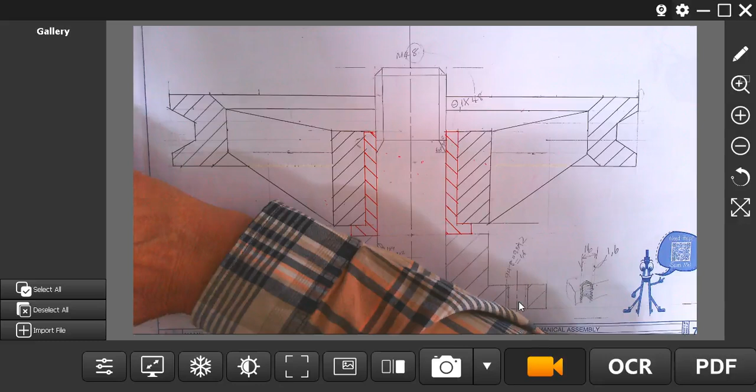I'm going to draw the nut. Now basically what you guys will have to remember is when we're going to draw the nut in place, we're going to draw the nut and it's going to cover up everything else. So it's going to be like turning a nut onto the screw thread.

Remember these lines here. I asked the grade 12s the same question. You guys could answer it. They couldn't answer it today. And I actually told them, my grade 11s know this and you don't know it.

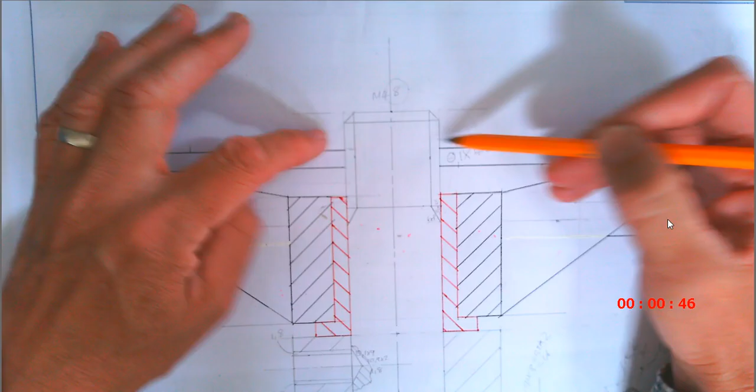Whatever the screw thread is, the M value is this width. So if they say it's an M24, this will be 24 from there to there. But we are drawing scale 2 to 1, so everything is double size. So what will happen here is this will become 48. So that will be a 4,8, 4,8, 4,8 at the top.

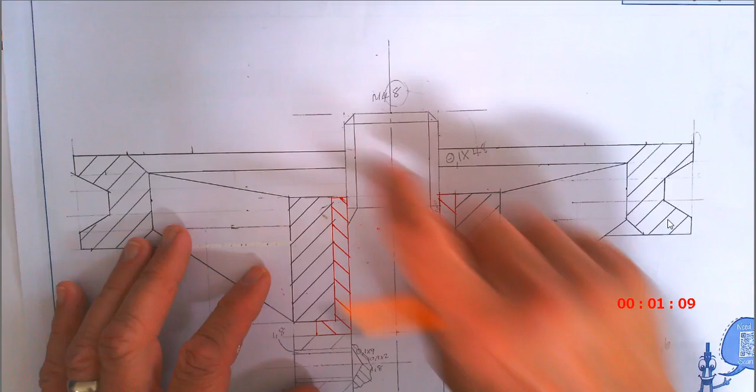Okay. The chamfer at the top, where it is lying at an angle, I told you guys that's 45 degrees, 45 and 45. And then this is where the screw thread ends, where that line is. And then I told you that if we draw this part in, this is where they end the screw thread. So the screw thread runs up to there.

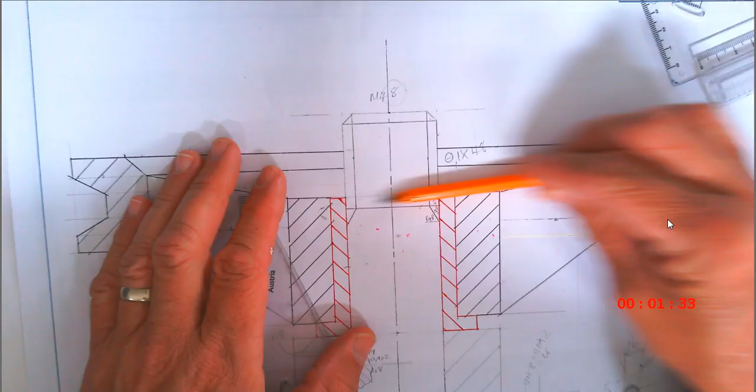What is a screw thread? That zigzag pattern that you see when you're turning onto a screw. And it ends over there. But this is where they cut it out, where they remove the bit as they're cutting it. So you have to draw that 60-degree line there. That's the only place where it is 60 degrees.

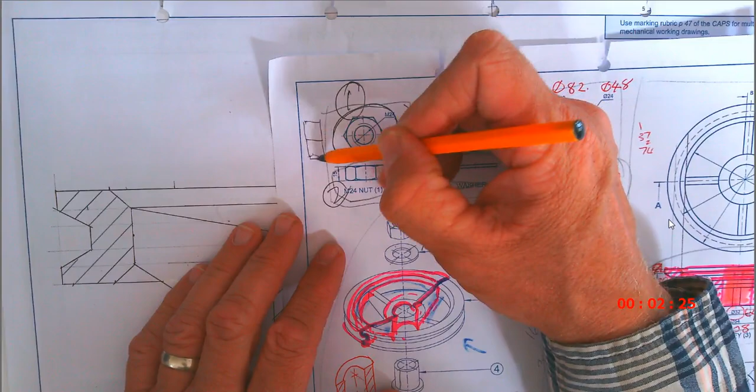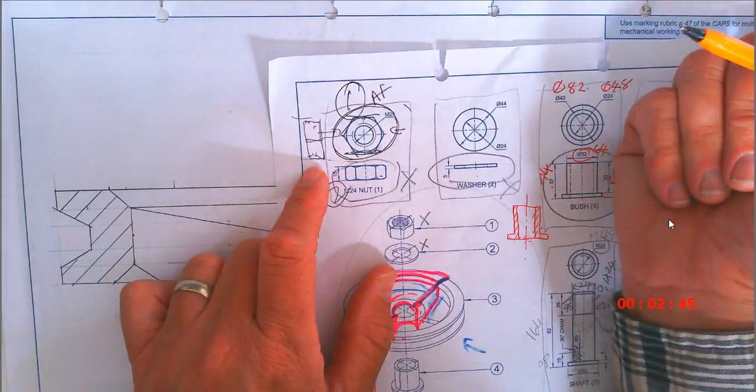What does that mean? It would mean that you're looking from the side or from this side and you're only seeing two sides of the thing. So if they give you the AF distance, AF meaning across flats, that would mean that you already have that circle size. So then you can just project your lines over and you can go on with your construction. But in this case, we actually see 1, 2, 3 surfaces.

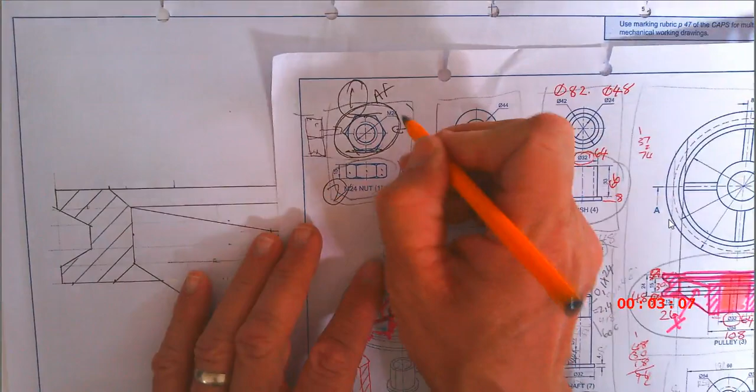Okay, so let's quickly focus on that. What we're going to do, because we have limited space, we can't draw the whole thing. I'm just going to draw half of the nut, so I'm just going to draw either the bottom or the top. Okay, but the first thing that we always do is let's quickly identify that hole. That screw thread is of course M24, which is going to become 48.

Okay, then you take that distance and you add half of it to that number. What is that? What is 48 plus 24?

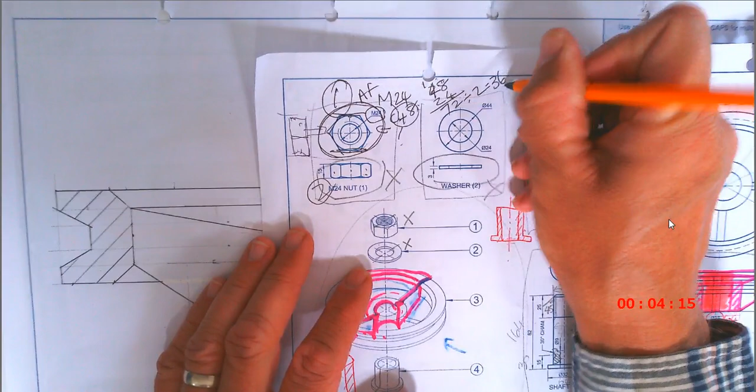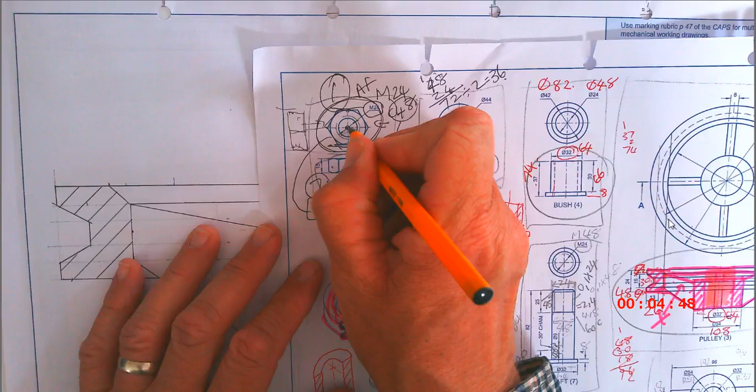Okay, so, as julle dit wil onthou, hier is die formule. This is the formula. You can also do it this way, 1,5, which is 1.5, times the M value. In this case, it's going to be 48. So, 1.5 times 48 is the same as 48 plus 24. Okay? And that you're going to take and you're going to divide that number by 2, and that's going to give you the radius that you're looking for. That's going to give us from there that size. If you don't have that, you cannot draw the nut.

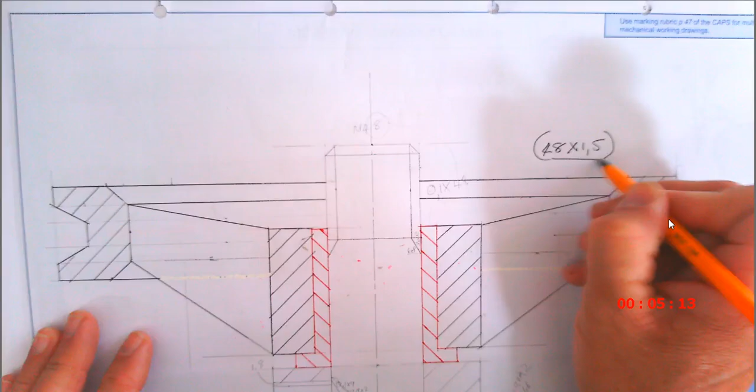I'm going to write it here as well. 48 in this case because it's M48 times 1,5, and then you take that number and you divide it by 2, and that's going to give you the radius for this specific thing, and this is going to be radius 36. Okay, right. So kom ons gaan doen gou dit.

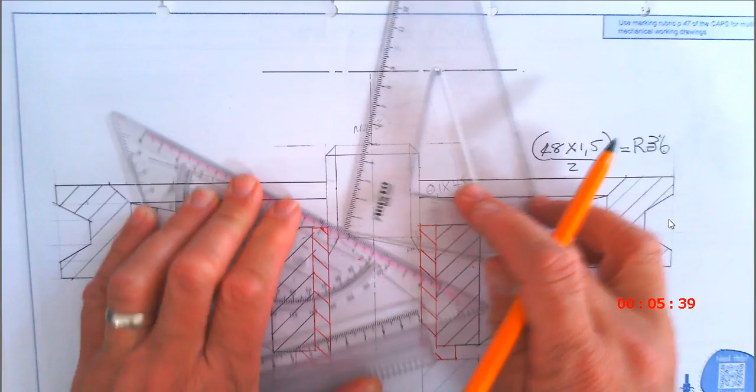My pencil jammed yesterday, so I'm going to draw the nut with something else. Okay, so I'm going to draw a center line here at the top, anywhere over here, because I am going to do half a circle, semicircle.

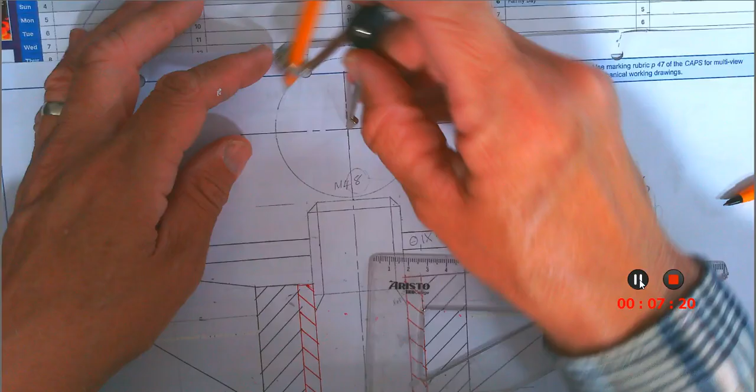Okay. I'm going to tell you guys in a moment why this is so important. There's so many marks on this part of the drawing that you don't want to get this wrong. Okay. I'll show you in a moment how this works.

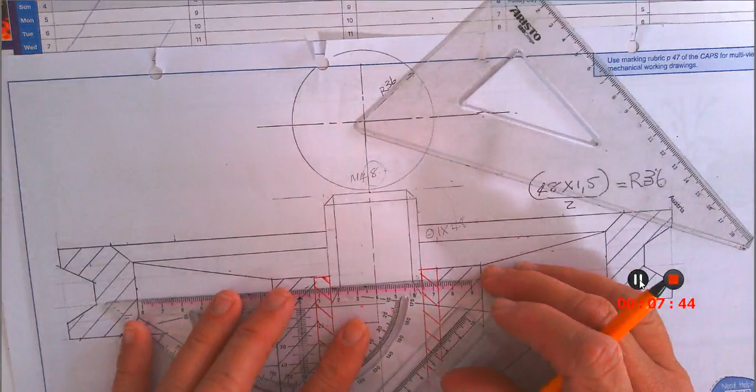Okay. So this circle has got a radius of 36. And I'm not going to draw the whole thing. I'm just going to draw the construction now, and I want to get the width of the nut. Now you're going to need a 30-60 degree triangle. This one. And now if my nut is positioned like it's in this case, where I'm going to see 3 faces, I'm going to move this line down.

Please remember this is not a normal hexagon. Okay, so it's not a normal hexagon like you always draw. So the lines are going to go on the outside of this object. So a horizontal line there, 2 60-degree lines, a tangent, in other words, it needs to touch the line there. It's going to run through that line.

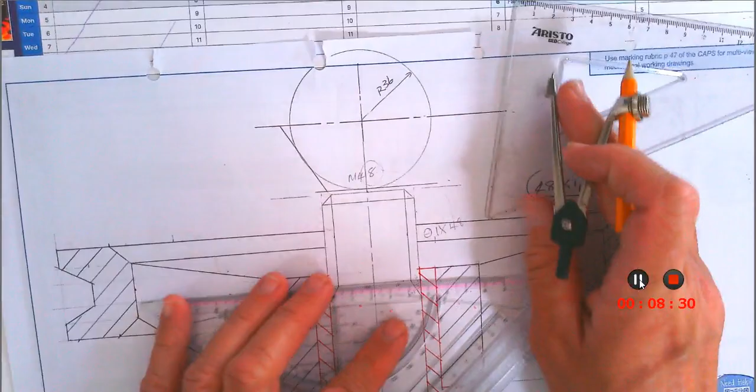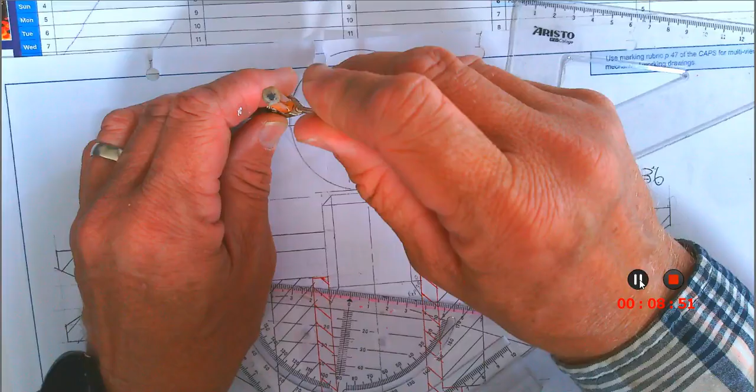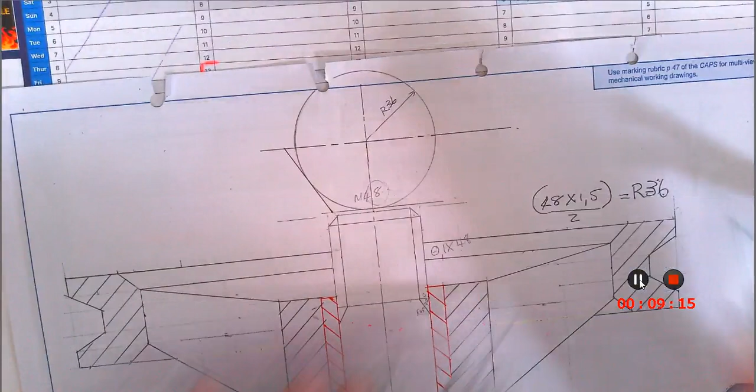That is slightly inaccurate, I can see it, and it shouldn't be inaccurate. I'm just going to fix that quickly. That 0.5 millimeter is going to give you problems. I'd rather redo it. Okay, I'm going to quickly try again. Okay, so going to draw a tangent here, make sure it's accurate. Okay, I'm going to do the same thing on this side. Make sure it's on the line.

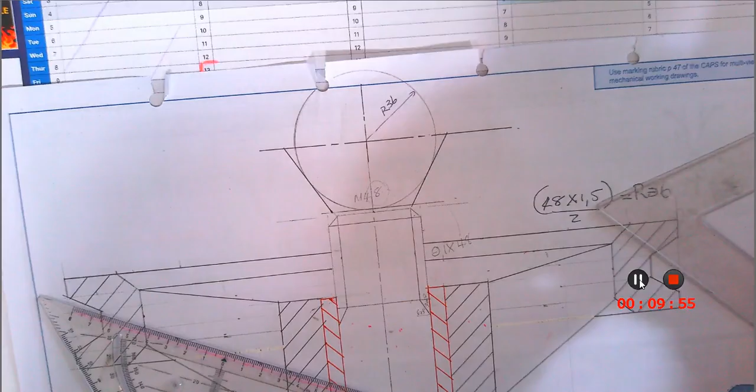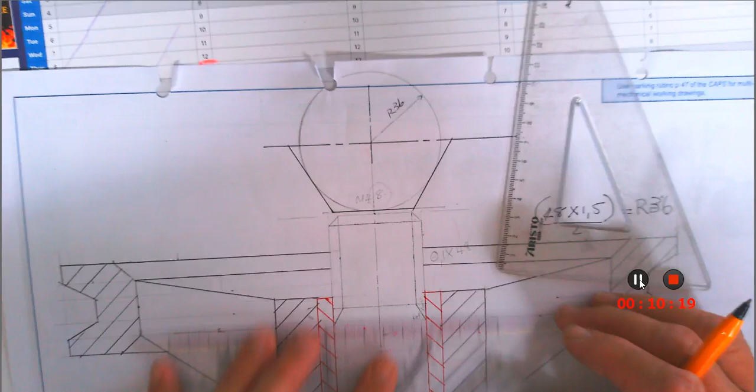Now we draw the upper part as well. We draw the screw thread and the M value circle in the middle. We're not going to do that now because we're not going to need it for this specific drawing. Okay, so what I'm going to do is I'm going to project the lines down, and this is what is going to give you the width for this specific drawing of the nut. So I'm just going to project all these lines down.

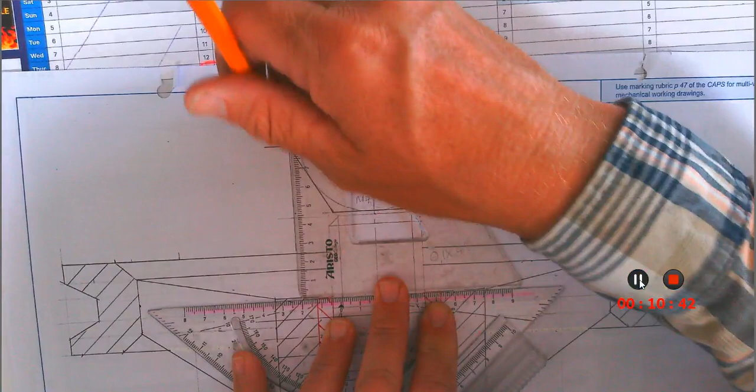Going to bring a construction line down there, a faint line. Going to bring a faint line down on this side. So there's a line. Going to have a line over here. Going to have a line over there.

So this I'm going to draw with a pencil, and I'm going to zoom in slightly so that you guys can see this even better, because we have to get this right.

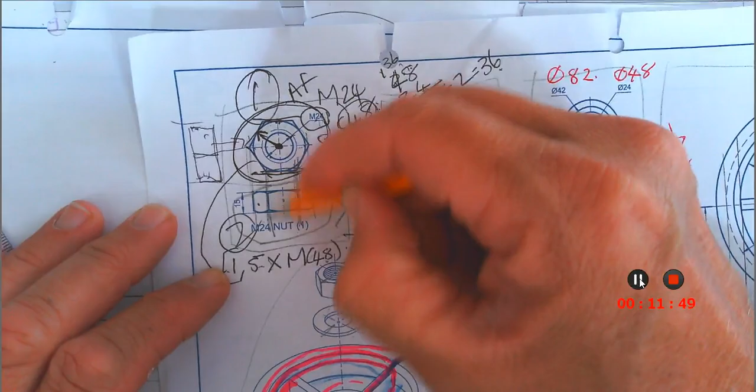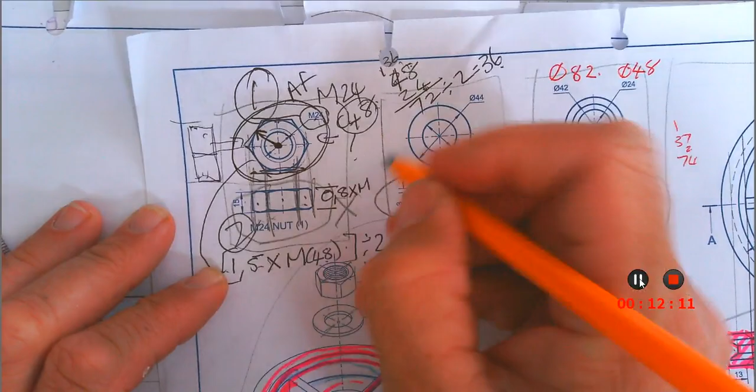To work out the height of a nut, if they don't give it to you, it's 0.8 times the M value. So in this case, M48. But you can work on whatever they give you. In this case, it's 15, which is going to become 30 on our drawing because it's scale 2:1.

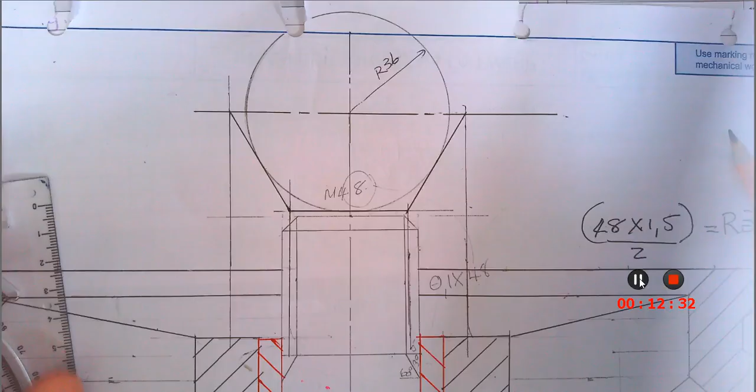What? The washer, né? Julle gaan sien hierso. There's the washer, and then it's the nut. So we have the pulley. We're going to draw the washer and the nut. Are we going to cut the washer? No, we're not going to cut it. And we're also not going to cut the nut.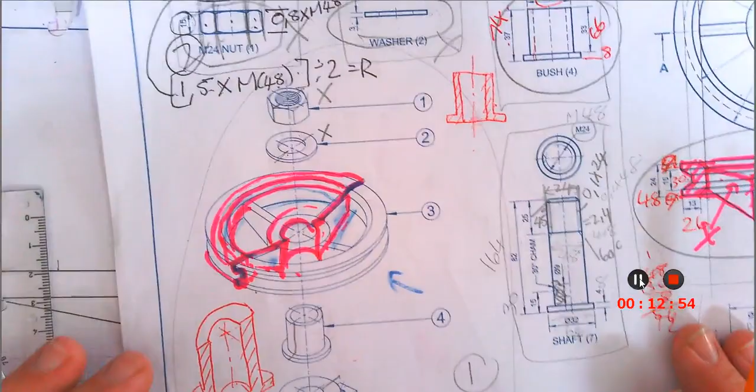That they give that to you. It is diameter 44, which is 88. And the height is 3, which is going to become 6. So 88 and 6. Ek gaan dit net gou inteken. So it's 44 to both sides. 10, 20, 30, 40. Daar's 44. 10, 20, 30, 40, 44. The height is going to become 6. Now I have a line there, so julle kan dit ook inteken. There's the washer.

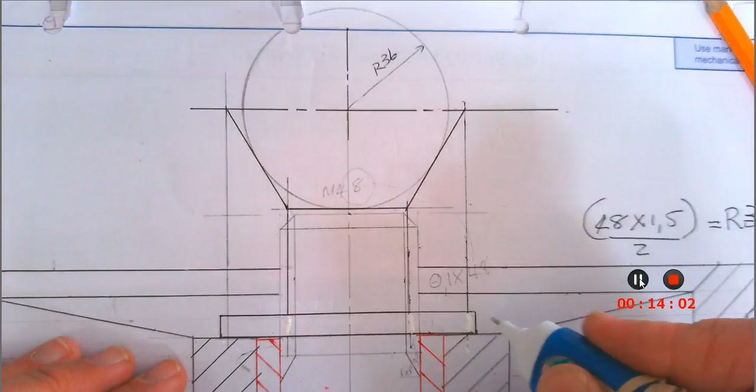That's not going to be there. Al daai lyntjies gaan opgecover word, né? So you're not going to have any of that. Please make a note of this when you are drawing this. Okay, so the nut is going to go on top of that washer. This is a round thing, it fits there, and then we're going to draw the rest.

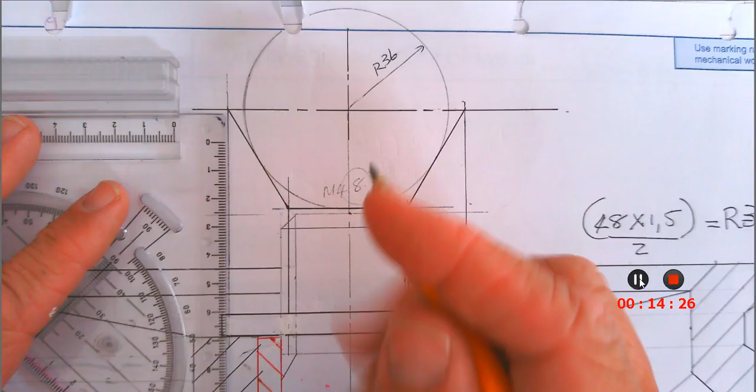Now we said that the height for the nut is 30, so let's have a look. Let's mark off 30 millimeters. 10, 20, 30. This is quite a big nut. I'm going to measure on this side as well. 10, 20, 30. Next time when you guys get to the AstroTurf, go and have a look at the nuts that they used

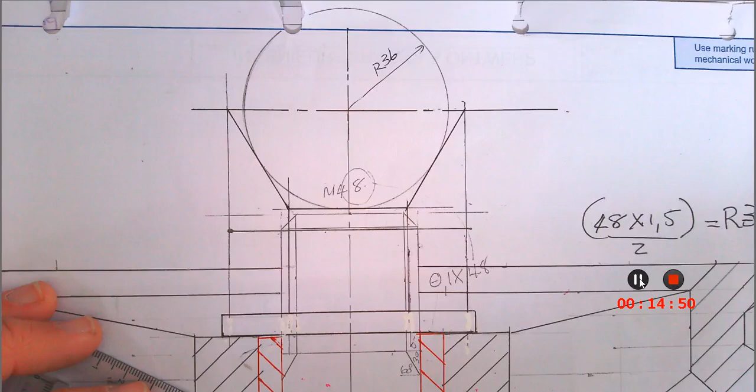But then you can see the detail of these nuts really well. Okay. So daar gaan 'n lyntjie wees. This is going to be a visible line. That corner there is going to give you a visible line right over here.

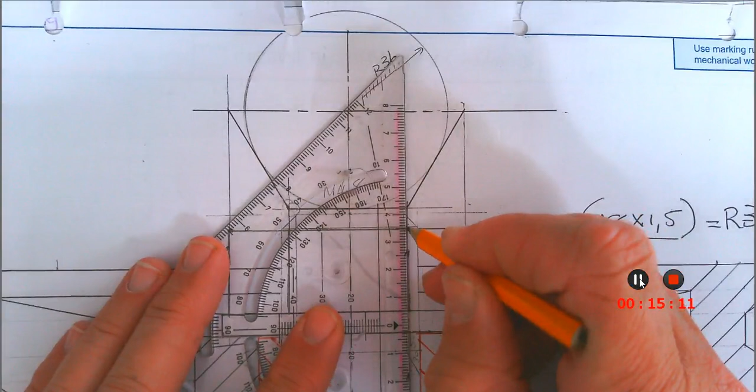This screw thread is still going to stick out. So make sure this is nice and visible. I'm just going to go over it once again so that you can see it clearly. Alright, that's still going to be there. The bottom part is still going to be there.

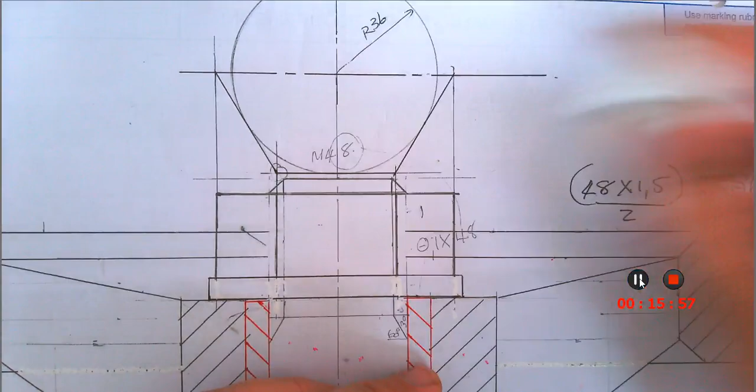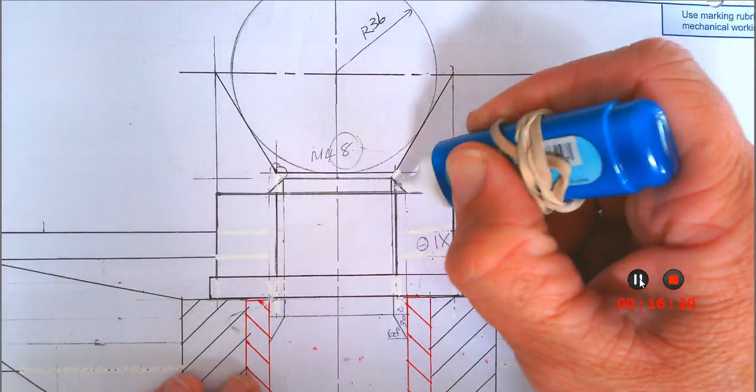This is going to fall away now, so we can actually erase these lines. Kan daai wegvat nou, ons kan hierdie wegvat, ons kan daai lyntjie wegvat, en die res gaan ek sommer gou uithaal. I'm just going to remove this quickly. Okay, why do I remove this? Because the nut covers up everything that's lying behind it. Okay, so the same with the washer. Good, that must also fall away. That's just a construction line. That's a construction line, so that must also be taken away.

Okay, nou wie kan gou vinnig weer vir my sê, hoe teken ons 'n moer? How do we do this part? Can you remember? Wie kan my help? Okay, dis baie maklik. As julle in julle EGD boeke kyk, where this chapter starts on mechanical drawings, you will see this. Okay.

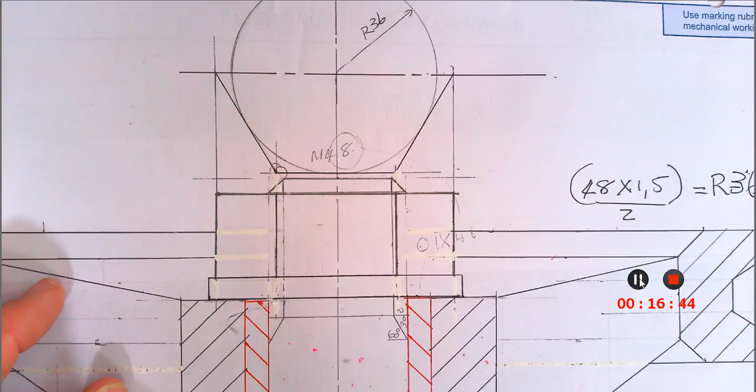Okay, so wat ek gou gaan doen, what I'm quickly going to do is I'm just going to finish the nut. Remember, the next part is construction lines. You're going to need your 60, 30, 90 degree triangle.

Try to work accurately. Okay, sit hom daar neer en trek vir jou konstruksielyntjie 60 grade uit daai hoekie uit en trek hom reg deur tot in die middel. So you draw that line straight through until it connects here in the middle. You're going to do the same thing.

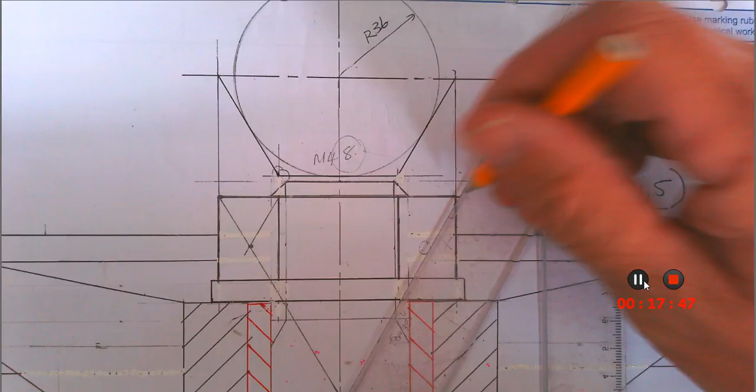You're going to do the same thing on the other angle, like this. This should also be 60 degrees like this. That gives us a point there in the middle, and we get a point here in the middle. We can do the same thing on this side, and then we're almost there. Out of that corner, 60 degree line. If you want to save some time, you can just copy that over to this side. It should be the same. Alright, there's my other point, and this is my point I'm looking for.

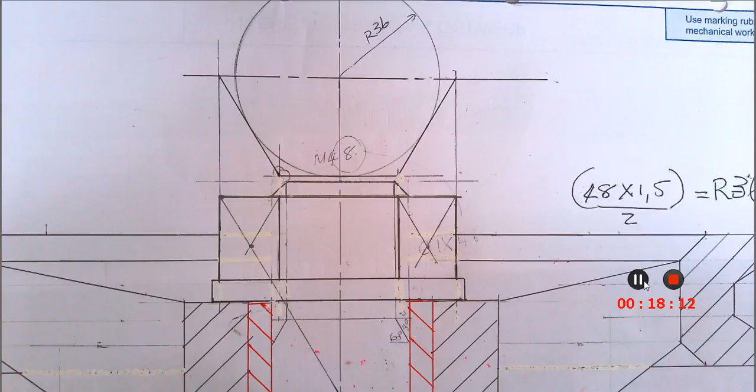Now I'm going to use this compass quickly, okay, and make sure that you place it exactly where it needs to be, there in the center. Open it up to the top of that line and draw in this arc. Okay, it shouldn't extend past that line, it must just touch that line. Okay, the same goes for this one.

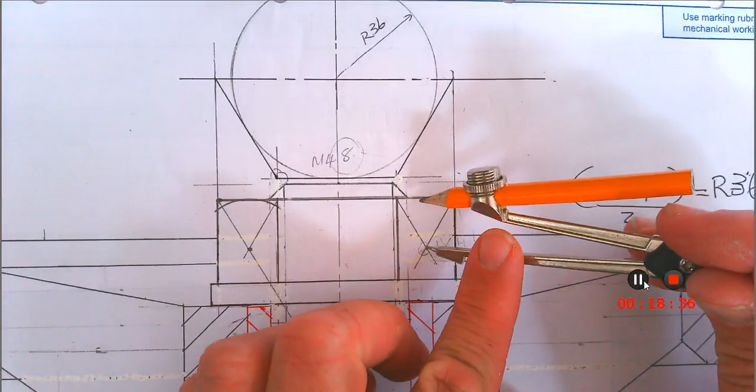Okay, die laaste deel is, ons gebruik daai punt, we're going to use this point here at the bottom, put our compass there in the middle, open it up right there to the top, and this should, if you worked accurately, line up with that point over there. There's a slight difference in mine, okay, but it should be very close to that existing thing over there.

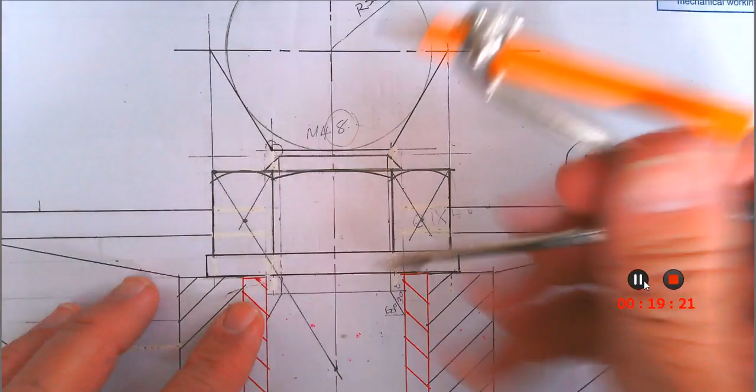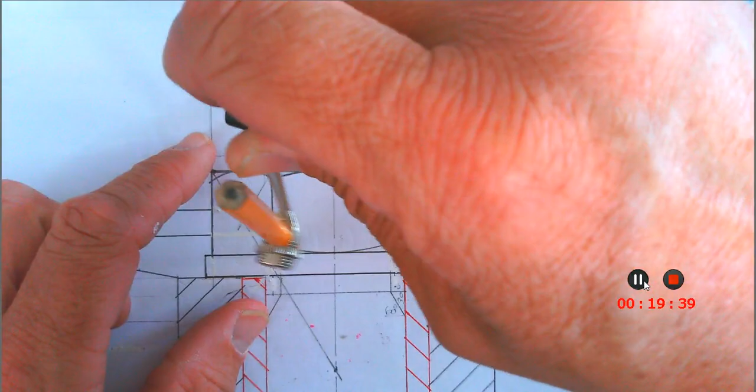If you have, like on this nut, the same arcs on the other side, you don't have to redo the construction. Wat kan julle doen? Draai net jou, what you simply do is, if this is the same radius, I'm just going to put my compass there, make a little mark at the top, and just turn my compass around. This saves a lot of time. So just do that, and I draw in that arc. Okay? Dis die vinnigste en die maklikste om dit te doen.

For these two lines, you can draw a quick vertical construction line to save you some time. Get this radius quickly again, and I'm just going to do the same line over here, quick construction line over here, en ek sit hom net op daai punt, maak 'n merkie, sit hom op daai punt, maak 'n merkie, just reverse your compass, and you are going to be there. Okay. Right, so there's the other side of my nut. Okay.

Right, and now I'm not finished with the nut yet. I need to remove this part. That's not going to be there. Need to remove that part. Remove that part. Remove that part over there. And now, laaste belangrik, what happens on the sides of the nut there and there? Who can tell me? Wat gebeur daar op die hoekies van daai moer? What happens there on the corners?

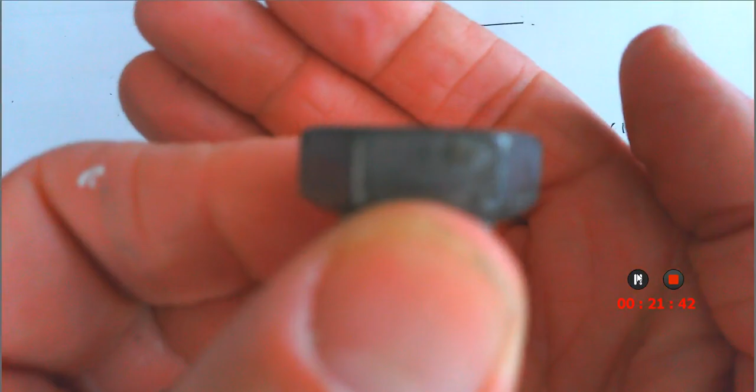It's got a little part there that goes down. And the reason we have that is if we put a spanner on this thing, it will basically make it easier to fit on there, and it's also so that you don't get hurt.

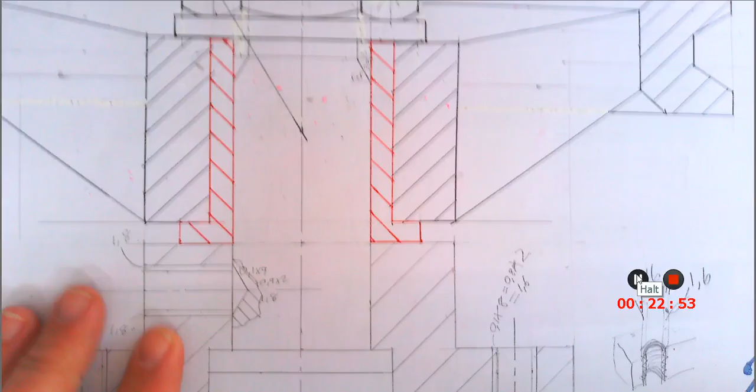Still need to draw that in. Wat ek nou sal doen. But for the rest, this drawing is finished.

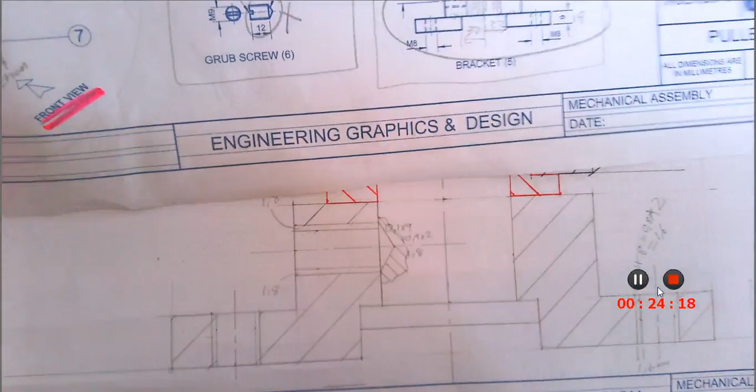Now I actually drew it for the grade 12s, and I'm going to show you how to do this. It says there on the side slot 2x2. Wat beteken dit?

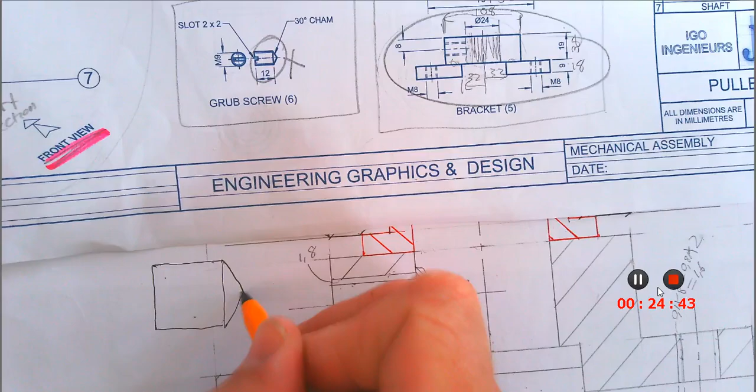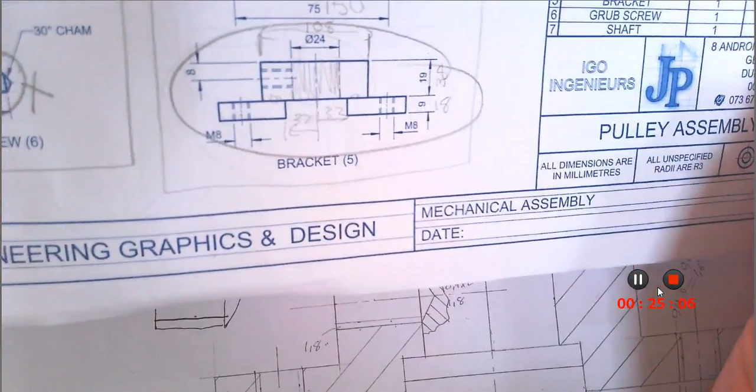Dan is daar skroefdraad hierso, there's screw thread there and there's screw thread over there. Okay, if this is an M9 times 2, this will be how much? 18, because it's double the size. So, what will that angle be? 30 degrees. Okay, from a vertical line, 30 degrees.

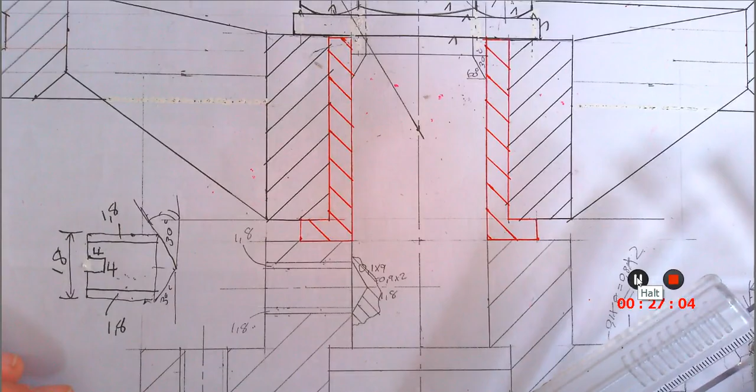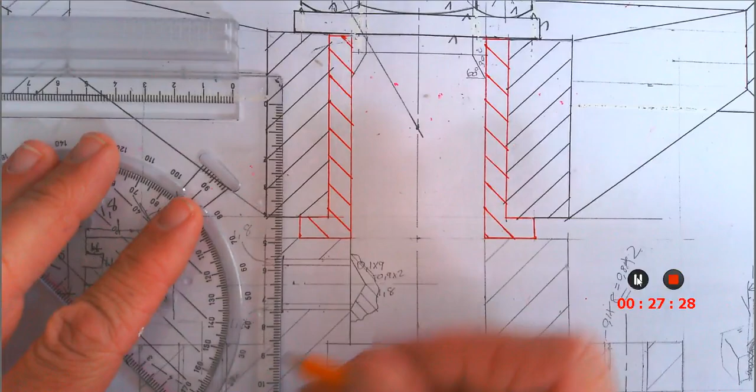The length they gave us is 12, so it's 24 from here to there. 24 up to this point. This is where it ends. I'm going to draw in that line. I'm sorry about this pencil, my other pencil jammed earlier. Then the slot is 4 millimeters deep, and it's also 4 millimeters wide. It's actually 2x2, but it's times 2. So this will be 2 to the top, 2 to the bottom. This will give me my little screwdriver slot where a screwdriver would fit into it.

Okay, that line will be erased over here. This line will be erased, so I'm just quickly going to fix this. Okay, that line should be there. The rest of this grub screw is in position now. So what you have to remember is my hatching will stop on the outside line here, because we are going to say that we're not going to cut that grub screw. But for this part, this is just normal screw thread. So on this part where it's not a screw being turned in, my hatching should stop on the inside line.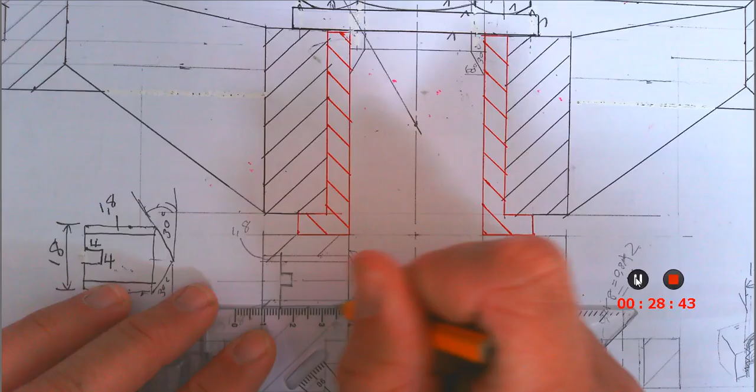Okay, so just where the part is turned in, it stops on the outside, but on this part it will end on the inside of that line. Just take note of that. That is very important. This is screw thread. This is actually the outside of the thread, which is the M value from there to there, and this will be the screw thread. If you cannot remember, in this case it should be 1,8, which is actually 2 millimeters if we round it. Okay, so make sure that you guys draw your drawing like this.

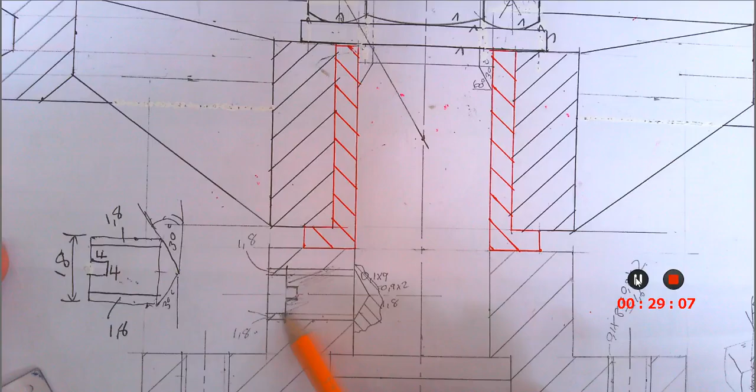I'm just going to color it in. The actual grub screw is now lying right over here. What is the function of this grub screw? It's going to turn in, and it is going to keep this shaft in position. Okay, so please finish this drawing for tomorrow, and make sure your hatching is correct. Make sure the webs are not going to be sectioned, and we're still going to see those lines at the back of the pulley. If you don't understand that, go and have a look at the 3D picture. Okay, thank you guys. Please finish this at home.